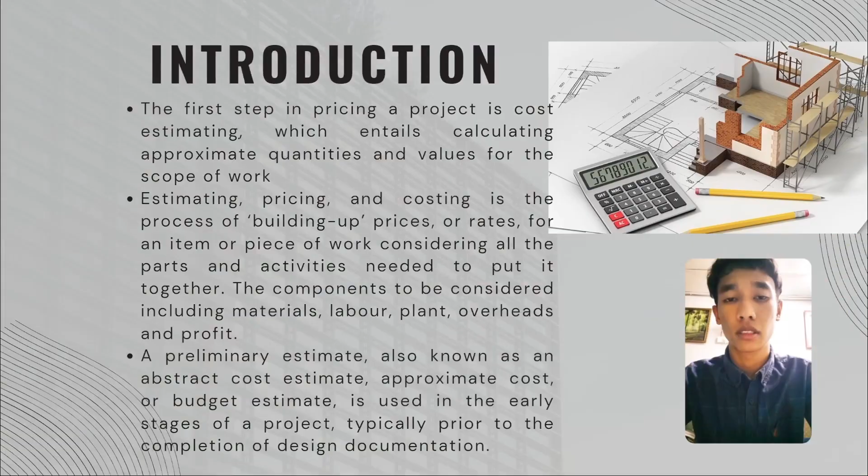First, I will talk about the definition of cost estimating. Cost estimating is the first step in pricing a project, which entails calculating approximate quantities and values for the scope of work. This is where the cost estimator does the take-off and develops the scope of work. Estimating, pricing and costing is the process of building up prices or rates for an item or piece of work, considering all the parts and activities needed to put it together. The components to be considered include materials, labor, plant, profit and overhead.

So, what is the preliminary estimate? A preliminary estimate is known as an abstract cost estimate. An approximate cost or budget estimate is used in the early stages of a project, typically prior to the completion of design documentation. So the owner of the project may use the preliminary estimate to assess how much financing they will require, or whether they can afford the project with their current funds. A preliminary estimate may often help evaluate whether or not a project will be done before it consumes too much of your time.

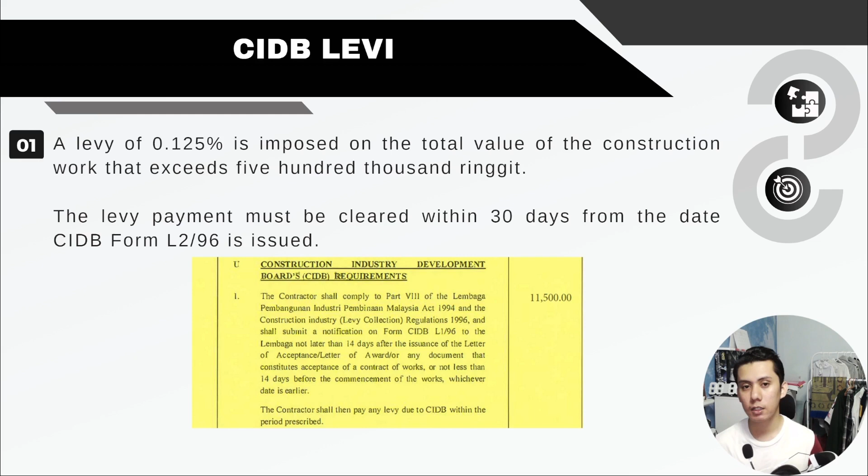The contractor shall comply with Part VIII of the Lembaga Pembangunan Industri Pembinaan Malaysia Act 1994 and the Construction Industry Levy Collection Regulation 1996, and shall submit a notification on Form CIDB L1/96 to the Lembaga not later than 14 days after the issuance of the letter of acceptance or letter of award, or any document that constitutes acceptance of the contract of works, or not less than 14 days before the commencement of the work, whichever date is earlier. The contractor shall then pay any levy due to CIDB within the period prescribed. So the cost for our CIDB levy is 11,500 ringgit.

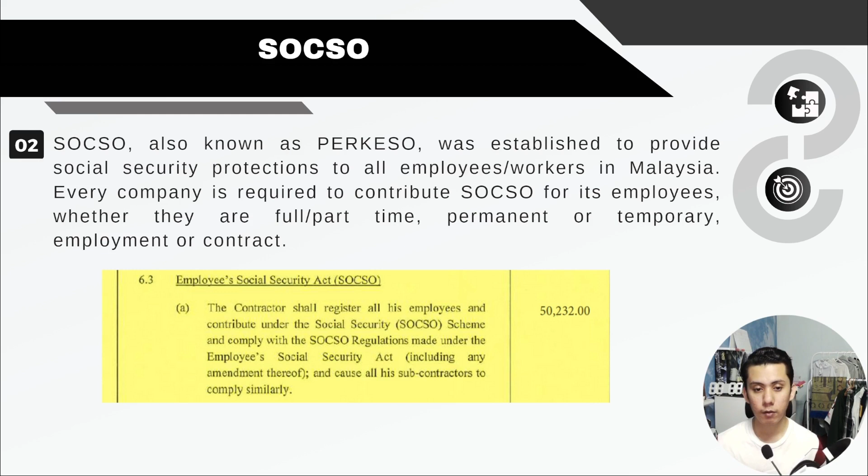The next one is the Employee Social Security Act, also known as SOCSO. The contractor shall register all of his employees and contribute under the SOCSO scheme, and comply with the SOCSO regulations made under the Employee Social Security Act, including any amendments thereof, and cause all of his subcontractors to comply similarly. The contractor shall submit before commencement of work, and from time to time thereafter, the insurance number of all workers registered with SOCSO to the architect for checking. If any default is made by the contractor in complying with the said act, the employer may pay any contribution to the SOCSO scheme and deduct the amount of such contribution from the monies due or to become due to the contractor. So the cost for our SOCSO is 50,232 ringgit.

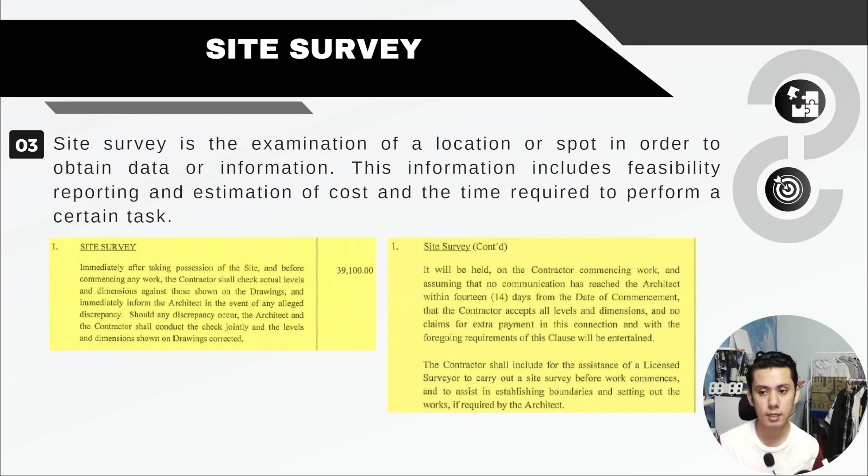Before the issue of the certificate of practical completion, the contractor shall supply the architect with 2 copies of the site plan prepared and signed by a licensed surveyor, showing the positions and all the levels of completed work, including other pertinent details as required by the architect, to agree as directed by the architect. The contractor shall provide permanent setting out marks and benchmarks in positions required by the architect. For the survey and setting out, the cost is 39,100.

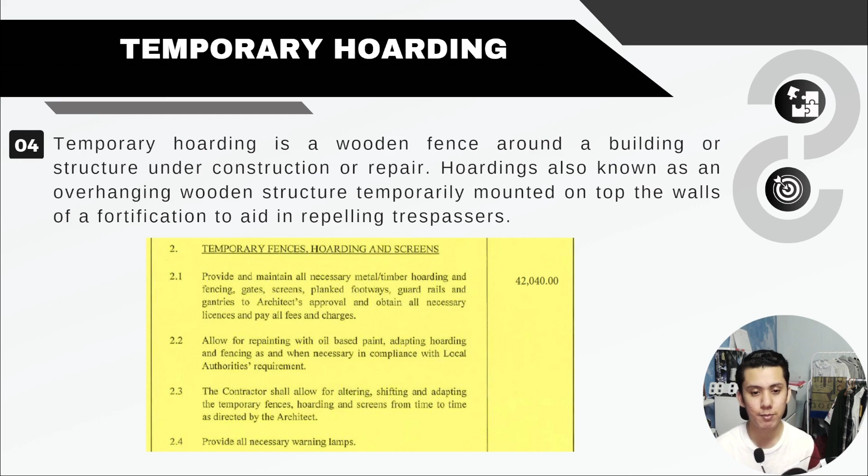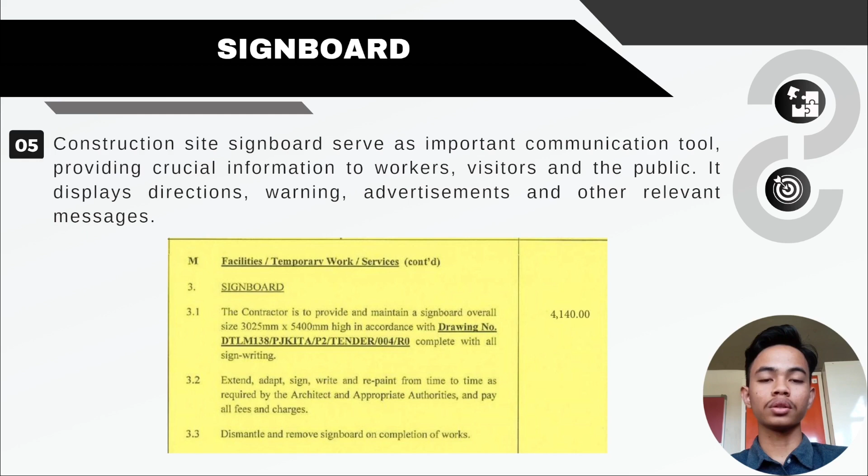A construction site signboard serves as an important communication tool, providing crucial information to workers, visitors, and the public. It displays directions, warnings, advertisements, and other relevant messages. In the context of this project, the signboard will convey safety instructions, project details, contact information, and regulatory notices to ensure everyone remains well informed. So the total cost for this signboard is 4,140 ringgit. And now let's move on to the temporary office.

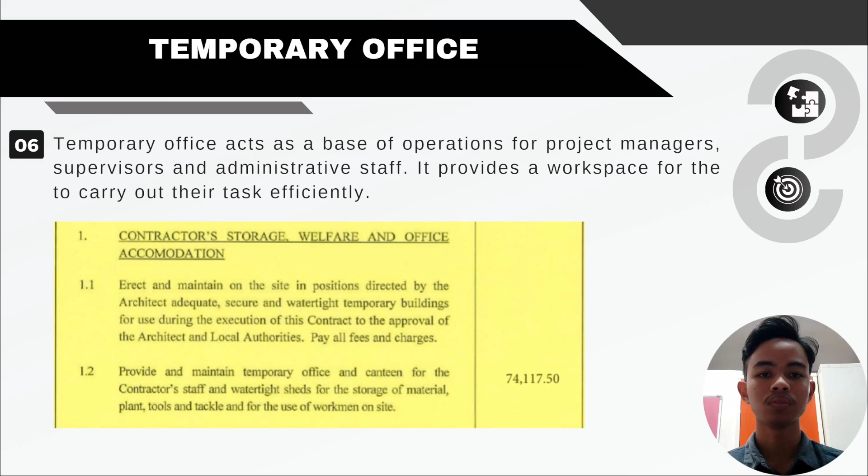During a construction project, a temporary office acts as a base of operations for project managers, supervisors, and administrative staff. It provides a workspace for them to carry out their tasks efficiently. Equipped with desks, chairs, computers, telephones, and other necessary equipment, this office ensures smooth administrative function on site. The total cost of this temporary office is 74,117 ringgit and 50 cents.

To ensure a construction site operates smoothly, site administration and safety are paramount. We have a site agent overseeing the overall project, a site engineer handling technical aspects, a site quantity surveyor managing costs, a site supervisor ensuring the schedule, general clerks providing administrative support, a storekeeper managing inventory, and security guards maintaining site safety and security. So the total cost for this administration and safety is 932,608 ringgit.

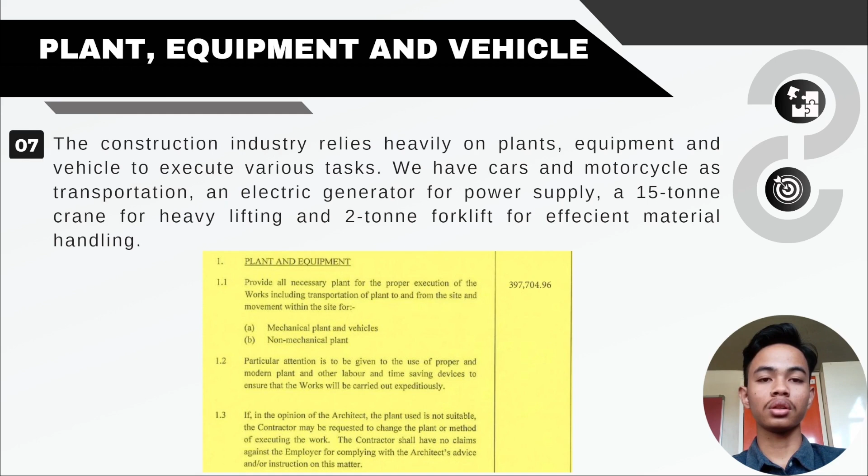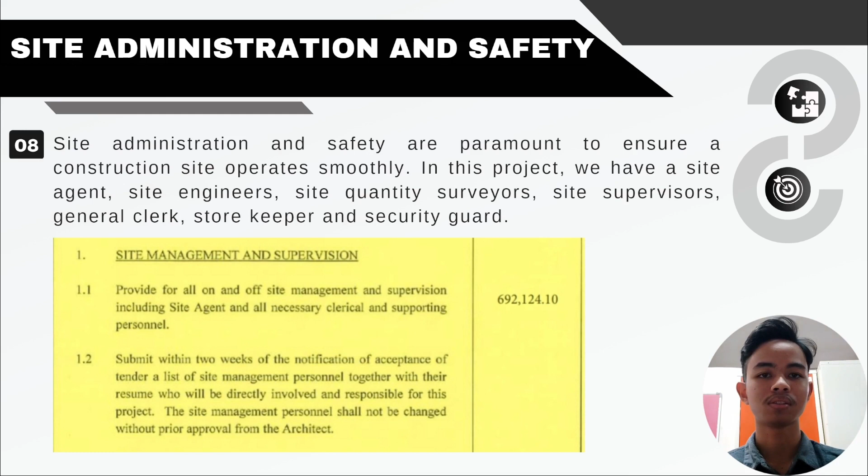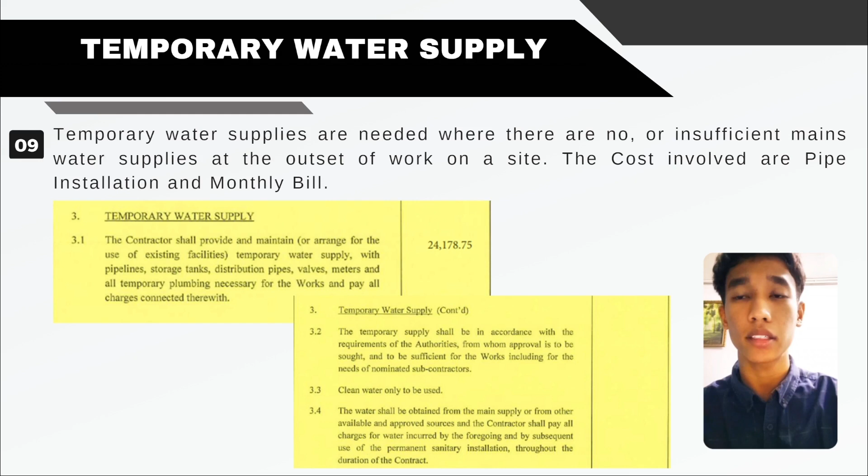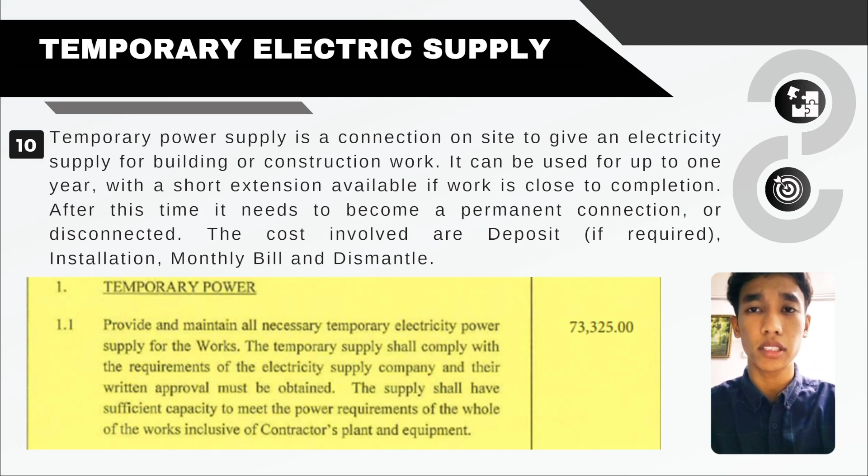The costs involved for the build-up rates are deposit if required, installation, monthly bill, and dismantle. And the total amount for the build-up rates is RM73,325. Next, the temporary road.

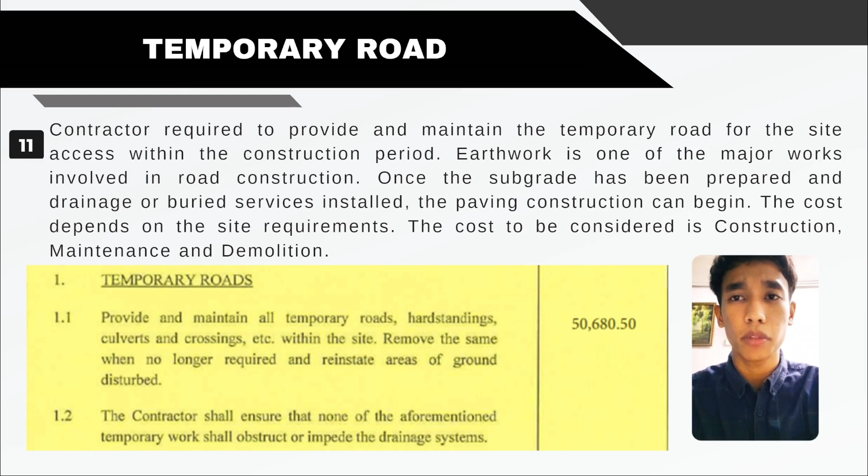Paving can be either flexible or rigid. The cost depends on the site requirements. The cost to be considered in the build-up rates of construction is the maintenance and demolition. The total amount for the build-up rates for temporary roads is RM50,680.50.

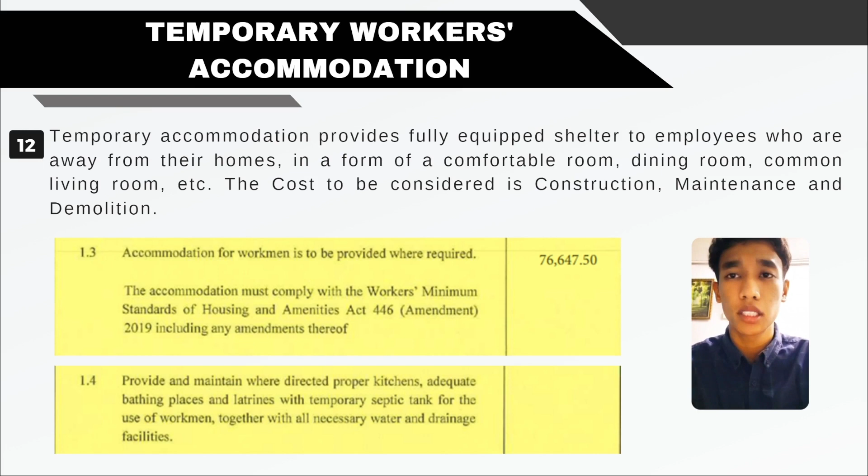The cost to be considered is construction, maintenance, and demolition. So the total amount for the build-up rate of temporary accommodation is RM76,647.50. So keeping site dry, the contractor is responsible to make sure the construction site is always safe and dry.

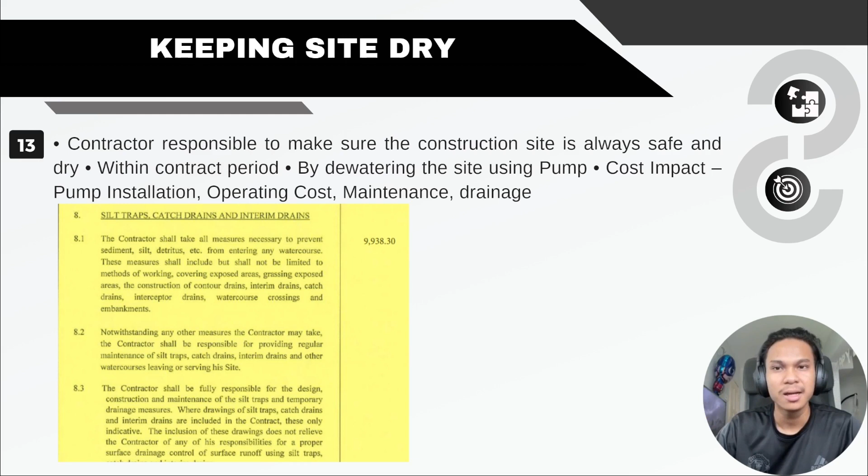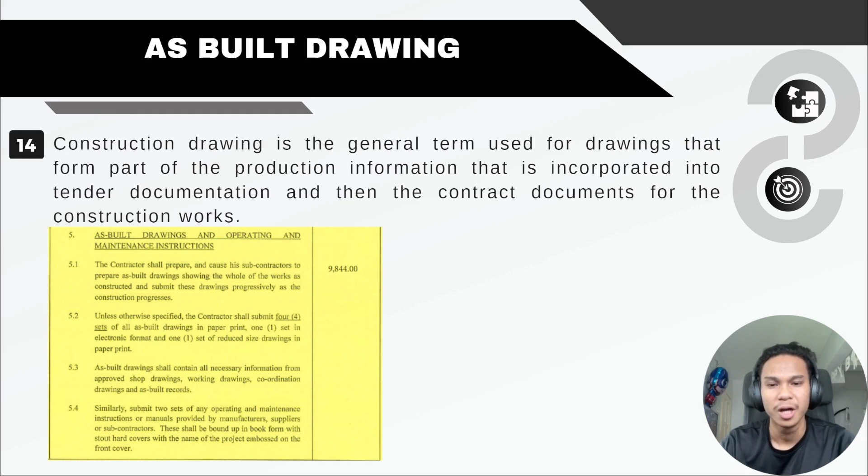Unless otherwise specified, the contractor shall submit 4 sets of all as-built drawings in paper print, 1 set in electronic format, and 1 set of reduced size drawings in paper print. As-built drawings shall contain all necessary information from approved shop drawings, working drawings, coordination drawings, and as-built records.

Progress report. Construction progress reports are prepared regularly, often monthly, by the contract administrator during the construction phase and issued to the client. There will generally be a summary of the report received and discussion held at construction progress meetings. So the contractor shall submit to the architect a monthly progress report indicating individual component progress made in the preceding month. Such reports shall show cumulative progress against scheduled completion expressed as a percentage of all items shown in the approved works program and shall also include a summary of the progress achieved through every phase of the contract.

The report shall relate to the key date achievement and indicate the degree of criticality on each activity. Any delays or potential delays shall be clearly identified and a statement given as to the measures to be taken to maintain the key dates. The report shall include projected work activities for at least 1 month ahead of those being reported upon, and data on labor strength and equipment employed.

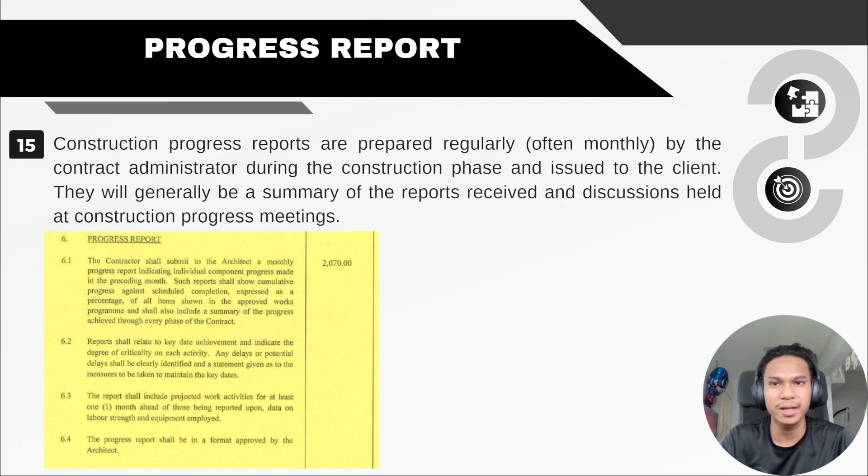Progress photograph. The purpose is to comply with the progress report as evidence of the work done. The contractor shall provide 6 sets of 10 inches by 8 inches color photographs taken by an approved professional photographer from a maximum of 12 approved positions at monthly intervals or at such other times as the architect may direct. The photographs shall be properly serialized, indicating the position where they are taken and endorsed by the contractor.

The contractor shall issue to the architect for safekeeping the negative or electronic file of all such photographs, which shall be the property of the employer on the completion of the contract.